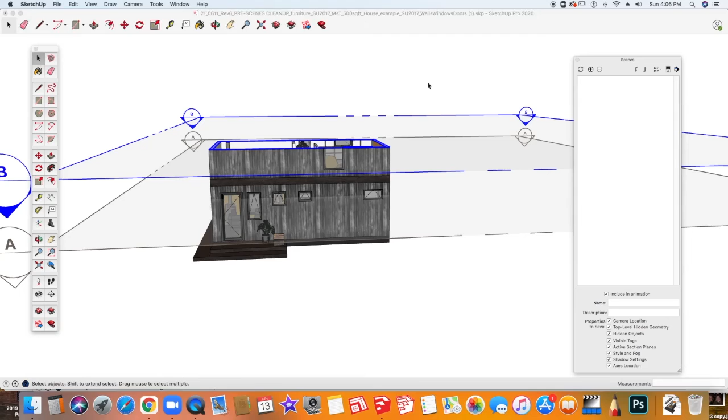So now we're ready to continue. I'm going to deselect the B section by just clicking away from it with the selection tool. And as you can see, it now comes back showing the entire house.

So now we're ready to set up our scenes. We've set up the style already, so that's going to be consistent throughout all of our work. We're going to create the section views first, and then we're going to set up our other views for our 2 3/4 views and also our elevation views.

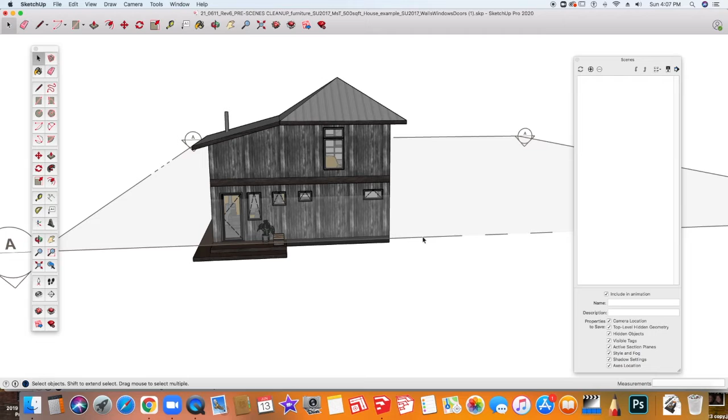So we're going to start with the first floor plan. I'm going to hide this section, and I'm going to activate the first section by clicking on it and making it the active cut. Next, I'm going to right click and I'm going to say align view. That's going to make it so that I'm looking straight down on top of it.

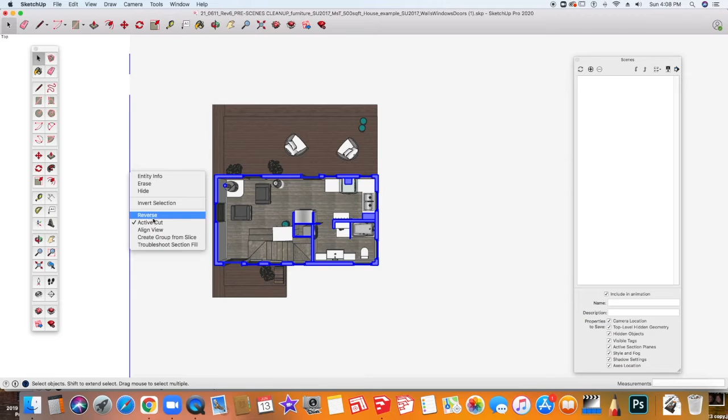And I'm also going to hide the section. So I'm going to right click here and I'm going to leave this on, but I'm going to click hide to make it go away so that we don't see it.

For this, I may go back to the styles and make it so that this is slightly lighter. So I'm going to open that window again, and I'm going to go to styles here, and I'm going to click edit, and I'm going to go to that window, and I'm going to make that section fill a little bit lighter. There we go.

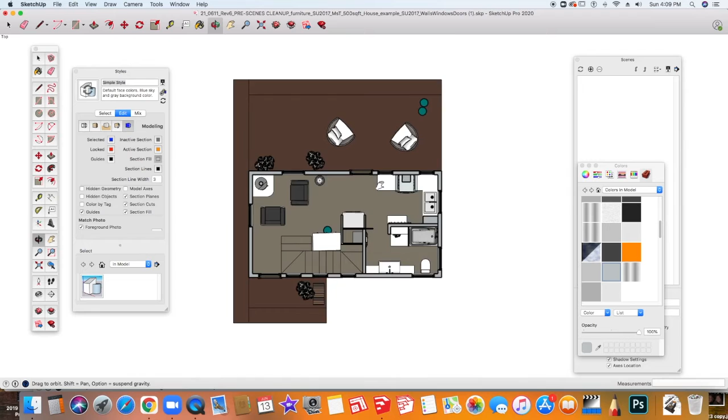That's much better. Now I'm going to change the view so that we're looking straight down on it. To do that, I'm going to go up to the camera and I'm going to turn off the perspective, and now we're looking straight down onto our model, and this is exactly what we want. You can also make this so that maybe your model fills the page a little bit better, but we want that view so that we're looking straight down.

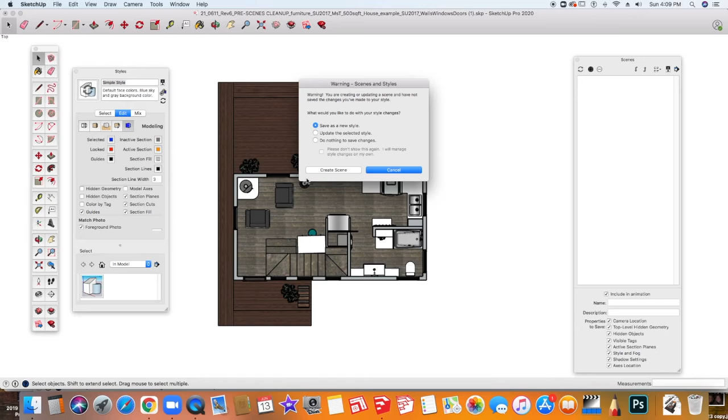And next, we're going to go over here to the scenes window and we're going to click the plus button. When we do this, because we made a change in the style, it's going to ask if we want to save it as a new style. And I'm going to say yes, I want to create the scene with this particular style. And then it creates the scene here.

In the name box, change this to what it actually is. And this is the first floor plan. Click enter to apply. Next, I need to get the outliner window open again.

And if I scroll down to the section, I'm going to turn on the second floor section, right click, and say make active cut. Now we have the second floor showing.

And again, I'm going to deselect it and I'm going to right click and say hide. And here we have the second view. Now it looks very similar to the first view, except the only thing that changes is the bed.

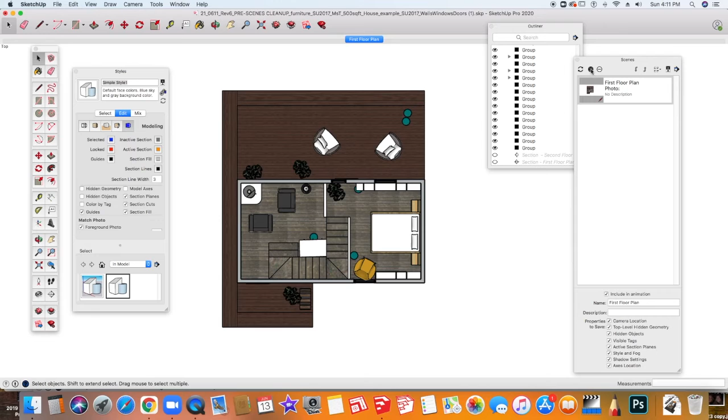So now I'm going to go up to the scenes menu again. I'm going to click the plus button and make this one the second floor plan. Again, going down to the name window, I'm going to write second floor plan and hit enter. They're going to show up here in the scenes window and also across the top of your window.

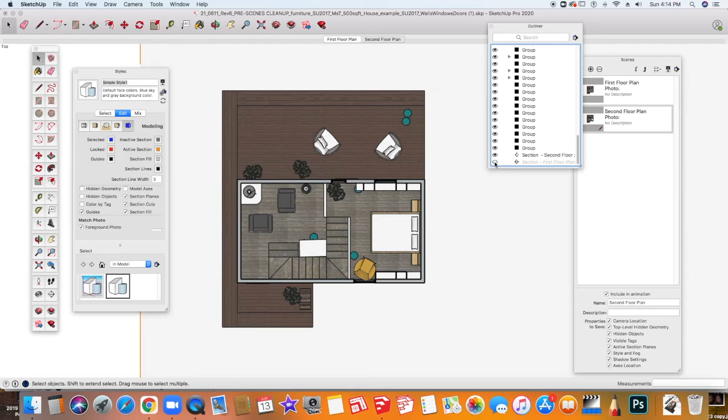From our floor plan, we're now going to turn on our section views and we're going to deactivate those cuts so that now we see the roof plan, and we're also going to hide those sections. So we're going to hide both of those sections.

You might have to go back and hide those. You can right click here on the outliner tool and click hide as well. And so that will make that go away. Now we have a top view.

So we're going to come back here over to our scenes window and we're going to click the plus button. We're going to call this roof plan and hit enter.

Next, we're going to change the camera view, and I like to use the side with the front door as the front view. If you're in Architecture 2, you're going to do it by the direction the house is facing on your lot, so it might be north, east, south, west. For Arc 1, we're just going to call this front, right, back, and left.

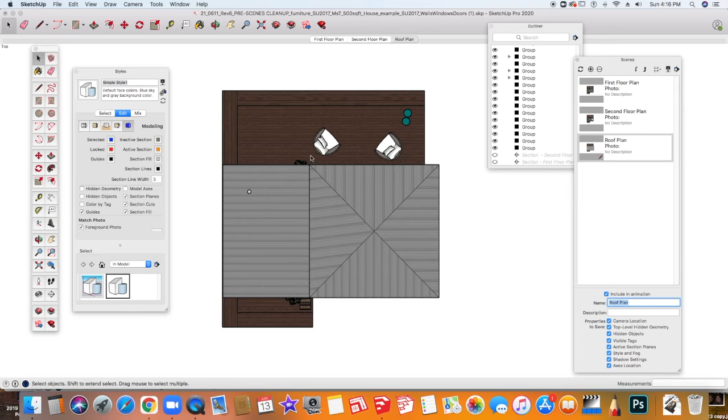I'm going to click the camera menu, go to standard view, and go to front. Let's see if that's the right one. It is, so this is going to be my front scene.

And so I'm going to click the plus sign in the scenes window again. And this time I'm going to call it front. You might want to call it front view. I'm going to click enter.

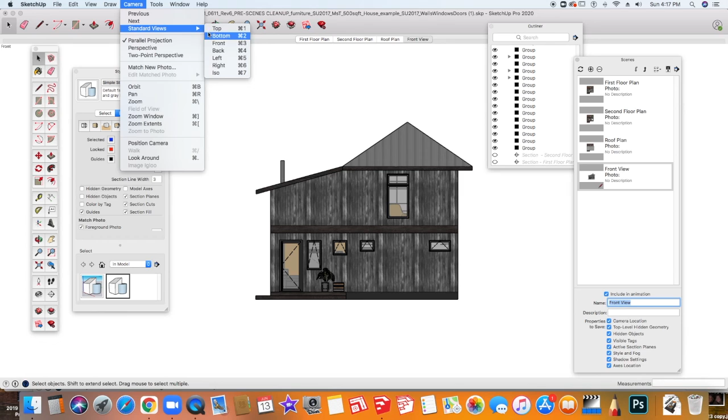Now I'm going to go back up to the camera, standard view, and I'm going to go to right. And again, I'm going to click a new scene under the plus tab there, add scene.

Now the reason this looks a little funny is I do have that angled part of my roof that comes down, so that's why it looks like maybe it's perspective, but it's really not. So this is going to be the right view. I'm going to hit enter.

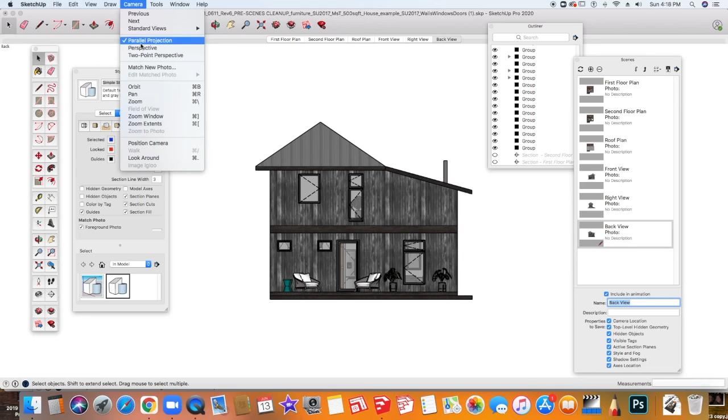And we're going to do that for all 4 of the sides. So I'm going to go to back, plus sign, camera, standard view, left, add a scene. So we have 4 elevations and a roof plan, as well as our first floor plan and our second floor plan. Next, we're going to create some interior views.